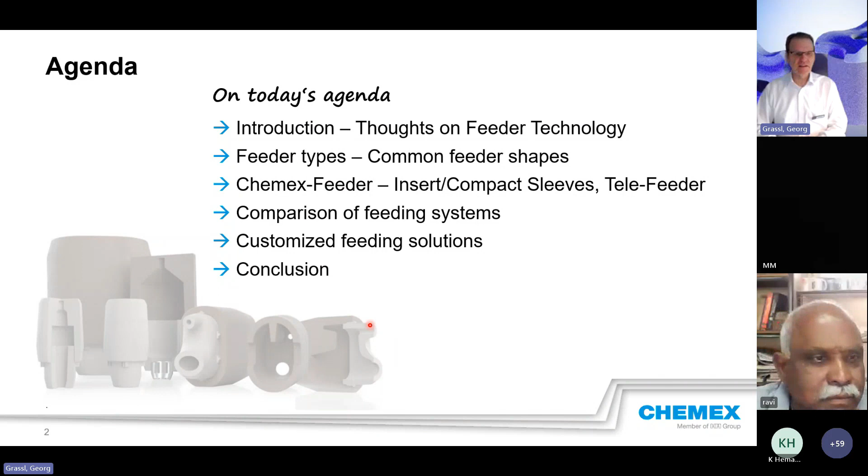So on today's agenda: a short introduction, thoughts on feeder technology and what foundries have to think about today, then feeder types. There are some common feeder shapes, different shapes available all over the world, and especially the Chemex feeders - insert sleeves, compact sleeves, Tele-Feeder. This has been our main product for more than 20 years. We'll also cover a comparison of feeding systems, customized feeding solutions, and finally a short conclusion.

So first, why do we need to feed the casting? I think all of us know why we have to do it, because all metals and materials increase their volume by heating up, by melting. This means, in the opposite, by cooling down, they decrease in volume.

This is very nice if we have a raw, pure material, but if we have different phases, like we have in iron, also in steel or other metals, then it's a little bit more tricky.

So with these two phases - phase one, the liquid shrinkage, and phase two, solidification shrinkage - we can support the process with the feeder. In the third phase, the solid shrinkage, underneath the solidus temperature when everything is completely solid, then we have to work with the pattern shop, with the pattern offset.

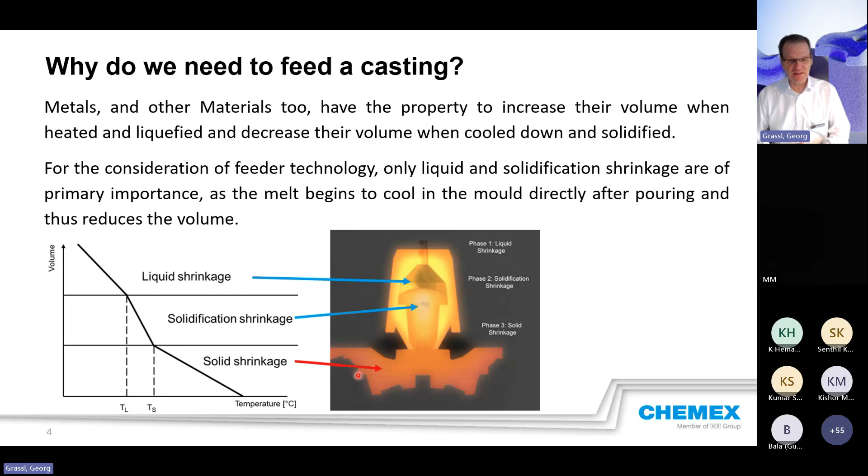For the natural feeders, you have the atmospheric feeder and natural blind feeders. Here you see just two samples.

So when we go to the bonded feeder, we can divide in the ram-up not possible. This means you usually use open feeders, or you use the blind feeders and add it later on. So both you can use with or without a breaker core.

When we go to the possibility of the ram-up possibility, then we have two sections. We have a compact feeder, which is like this. Also you can use this, the Tele-Feeder.

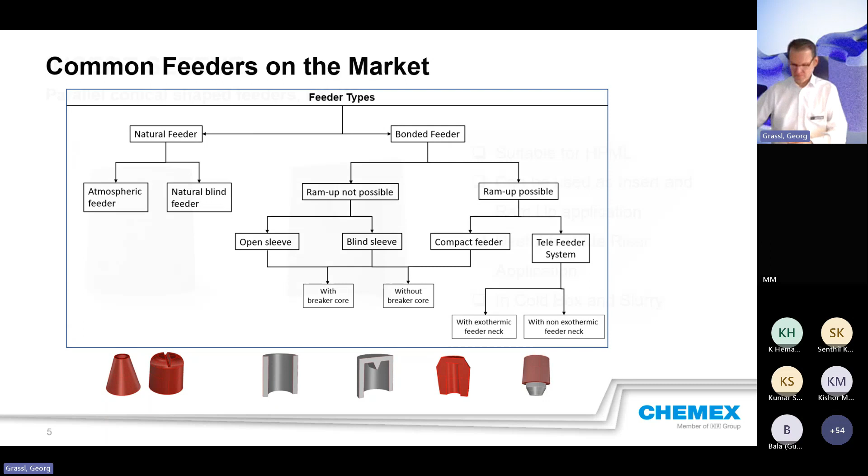So first, the insert sleeve, we call it insert sleeve. In Germany we call it EK. This is a parallel conical shaped feeder. It's an old type. This was started using when they had the first generation of molding lines, automatic molding lines.

At this type of molding line, it was not possible to ram up, place it direct on the pattern before filling up by sand. So the feeders were added later on in the mold. This type of feeder is suitable for the high pressure molding lines and can be used as insert sleeve, but also now as ram-up application.

Also this is useful to place it on the top of a side riser, of a natural side riser, because it gives more power to the feeder and also supports the yield, because you can reduce the volume of the natural feeder. These types are available in cold box bonded material and also slurry one.

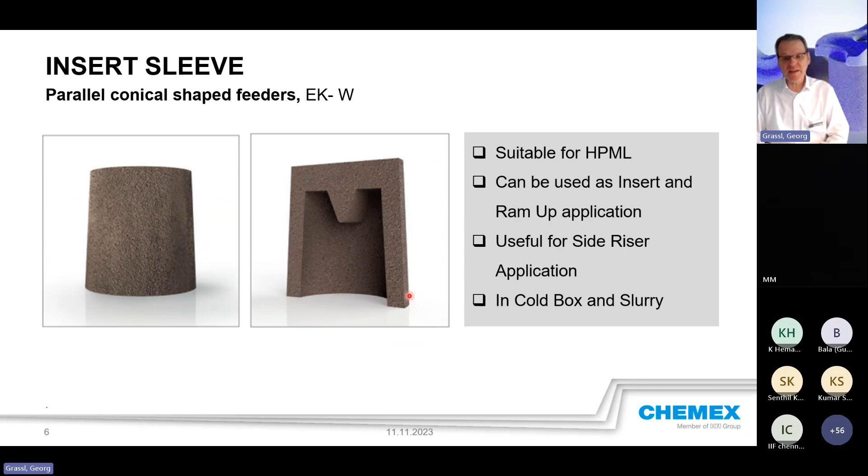There is another part or another shape of the insert sleeves, which is this one. The outer shape is exactly like the same as before, and the specialty is the inside. We have a much longer Williams bar, and the idea behind it is to give more power and to reduce the volume.

These feeders are also suitable for the high pressure molding line, and the same like the one before, can be used as insert sleeve, but also for ram-up application. Also it's useful for the side riser application, and as I said, made for yield improvement.

Let me tell you a story about what we had in Germany. We had a foundry here which were using our standard product with the standard William bar. And they used what we call EK6090W, which had a modulus of 1.7 centimeter and a volume of 178 cubic centimeter. The customer came to us and asked if we can reduce the volume of a feeder, because the customer had an automatic molding line, and the intention was to pour more molds out of the same ladle.

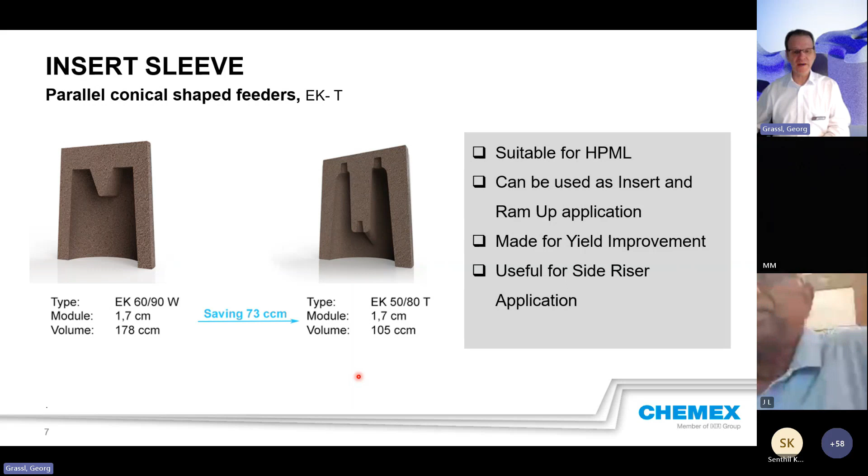As I said, it's very helpful, or can be very helpful, to place such a sleeve, a standard one or a turbo one, on top of a natural feeder. In this simulation picture, you can see we have a casting, and we made this simulation to show the advantage.

When you see this one, this is without a sleeve on top. In the same cooling time, it's very small and even a cold hotspot now. Here we have it covered with an exothermic sleeve, and you see here it's much bigger and much hotter, much higher temperature of the liquid metal. So this material can still feed, but this one, yeah, it's very tricky now.

So this is an advantage even for the customer because he can reduce the size of the feeder.

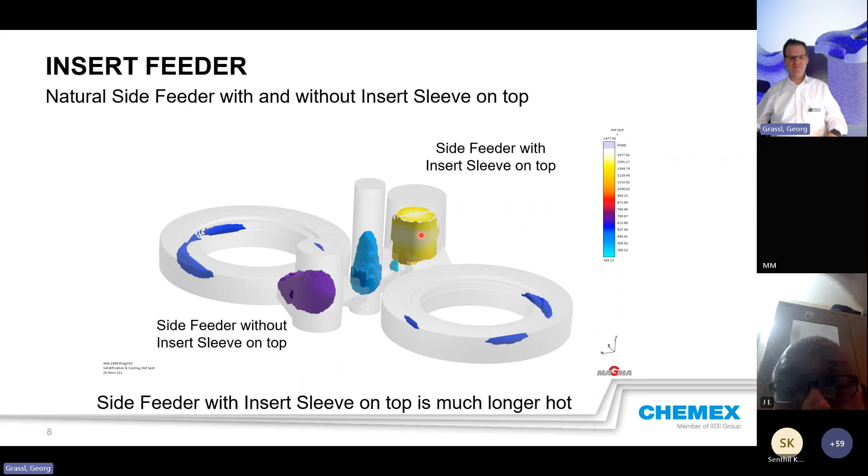With the second generation of automatic molding lines, they were able to place a feeder on the pattern. So the ram-up possibility was given, and we developed the compact feeders - we call it the CD type. These types are suitable for high pressure molding lines, also for ram-up, and they can also be used for core package applications.

So this is also useful for side riser application, and also, as I said, for core packages. So it can be used on top as well.

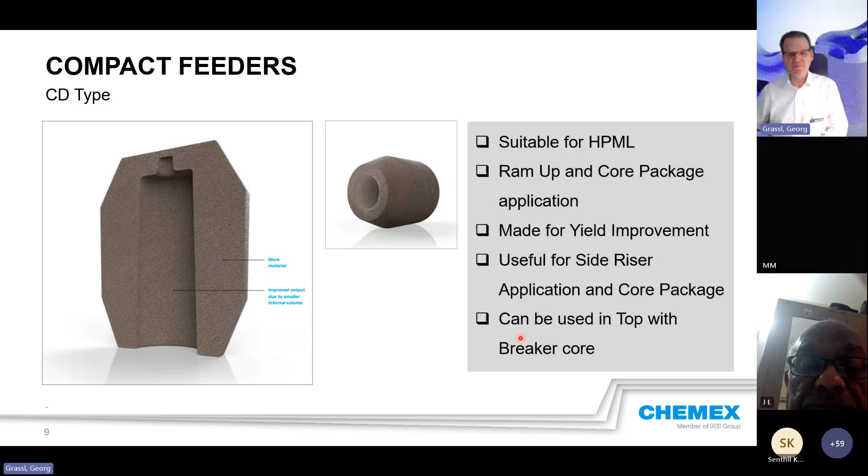Also with the second generation of molding lines, they increased the compaction pressure, the squeezing pressure. And what we found quite often in foundries were broken breaker cores, or even worse - in the worst case, the complete feeder was broken. So we also discussed with customers, and they said the biggest problems were low yield, high fettling costs, increased scrap rate, and limited space on the pattern for risers.

We were thinking about what we could do, and one of my former colleagues had a good idea. He found a solution, and now Chemex can provide high feeding efficiency with our products, high strength - they will survive all the squeezing - feeders with a low footprint and a compact design.

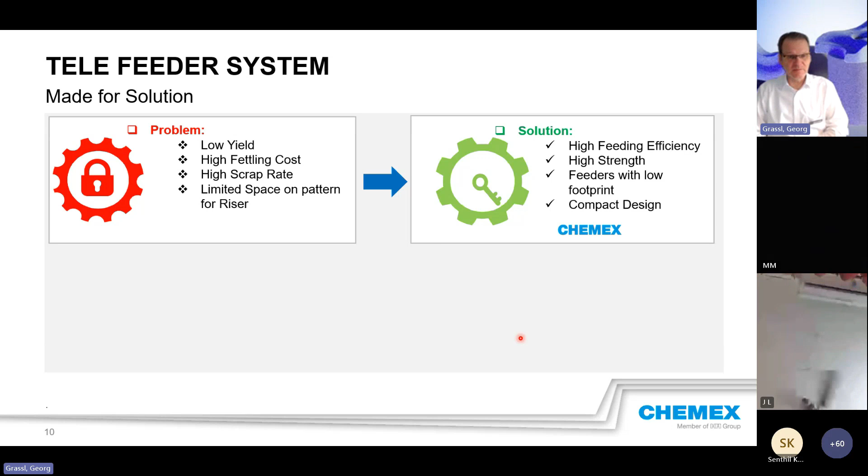The advantages for the foundries are they can use the highest possible compaction pressure of the molding equipment without damaging the feeder. This gives more freedom in placing a feeder, and this is nowadays even more important because we know casting designs are more complex. So now we can mold even more complex casting designs with high feeding efficiency, and this leads to better casting yield - a very important advantage.

The material we are using is without fluorine, so this means no fluorine-related defects, like fisheye for example. When you see slurry products, they have a fluoride content on average of 2%, 3%. So we have no fluorine in our material.

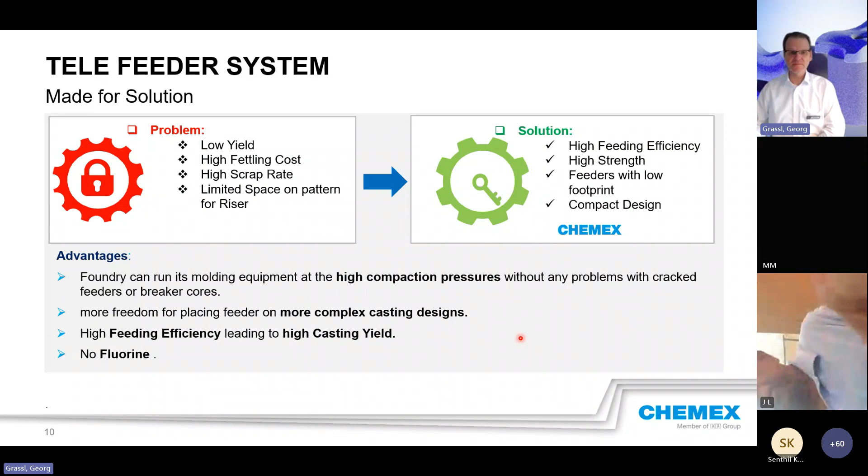So this is how our solution looks like. We call it the Tele Feeder because we have a telescopic movement. Number one, we have a high output, volume output up to 50%, meaning a discharging factor of 50%. We have a telescopic movement - during squeezing, the upper part will move down and cover the lower part.

At the same time, there is no pressure on the lower part, and you have much better sand compaction underneath the feeder, the upper part.

Our lower part of the feeder is always exothermic material, because this is the section that needs to stay quite long liquid. We've also added a very nice, well-defined breakoff edge, as you can maybe see here in this section, because we like to knock it off easily, and this supports that.

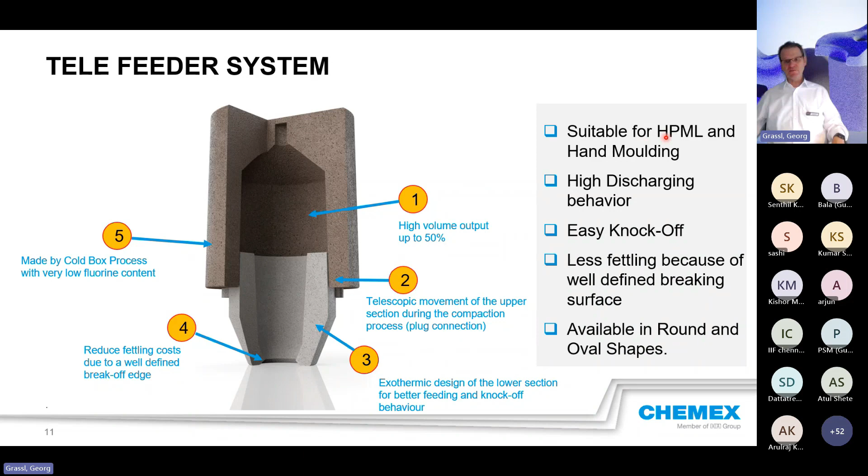So this means it's also suitable for the high pressure molding line and also for hand molding. In hand molding, sometimes jobbing foundries or steel foundries which have bigger parts do not need an exothermic upper part. So they use an upper part as isolating or with isolating material, and the lower part is always, as I said, an exothermic material. So a high discharging factor, as I mentioned.

Easy knockoff based on this very nice breakoff edge, less fettling cost, also based on number 4. And these feeders are available in oval shape and in round shape. We have the possibility to combine a round upper part with an oval outlet, or we have both in oval, an oval upper part and an oval outlet. So we choose this according to the application of the customer.

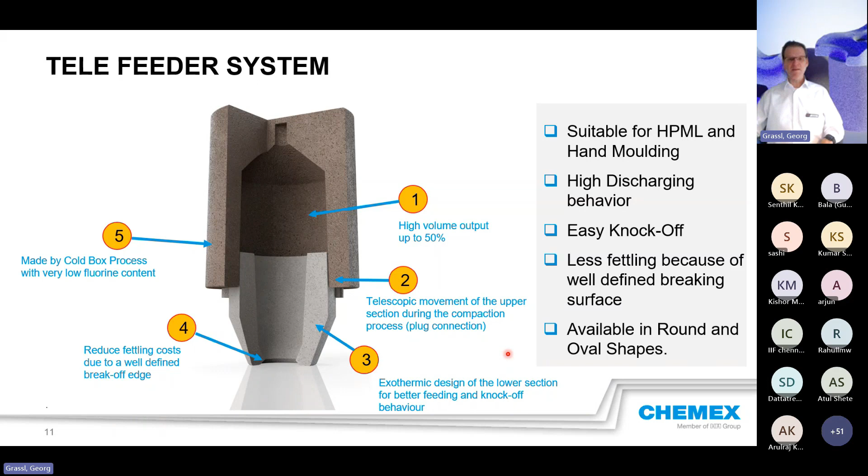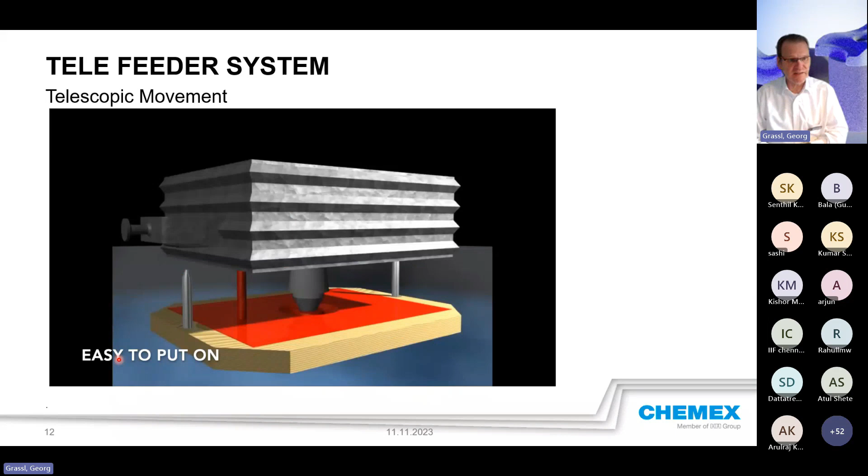Where do we have to place the feeder? What possibilities do we have, or the customer have? This is an animation of how it works on an automatic molding line. So it's easy to place based on the inner shape.

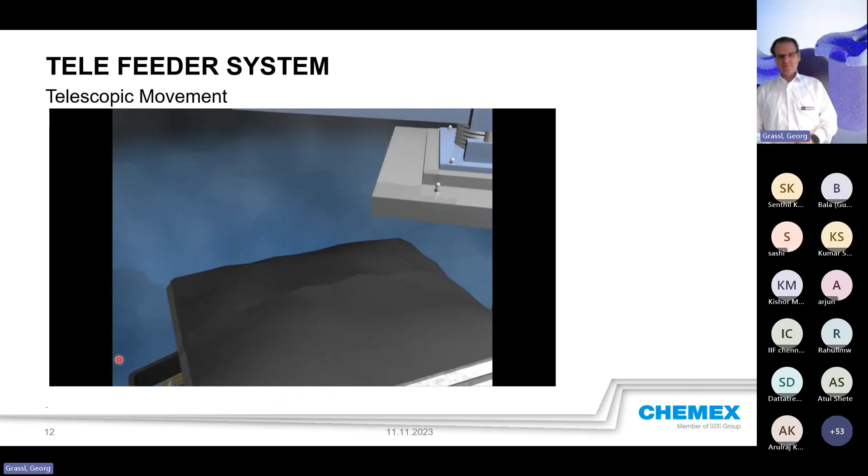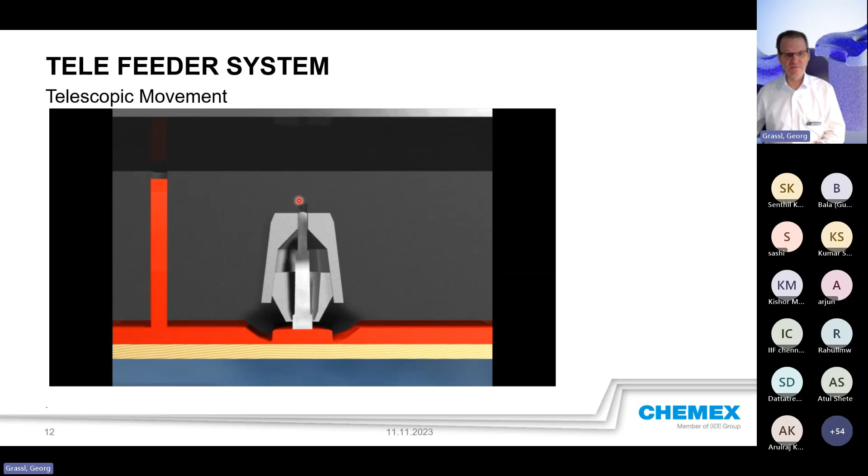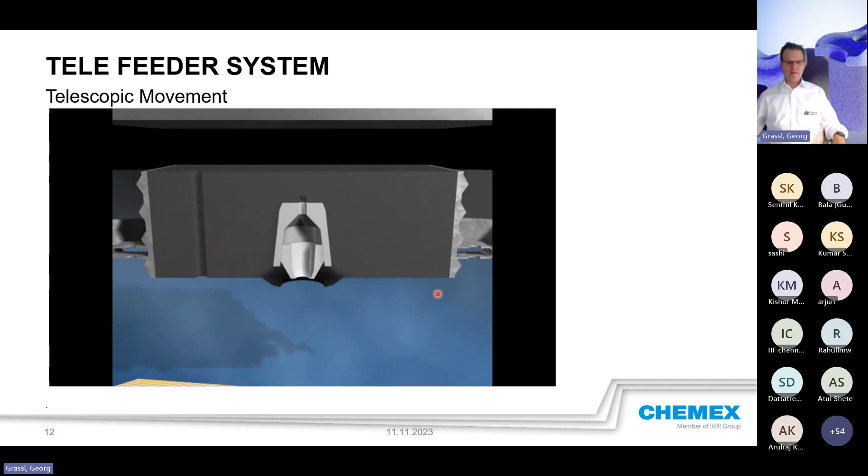It will fill up the mold. Please keep an eye here on this section and the same on this. The pin goes through, this is for better venting, and at the same time you have much better compaction underneath. This means there is nothing falling down inside the mold during closing of the mold.

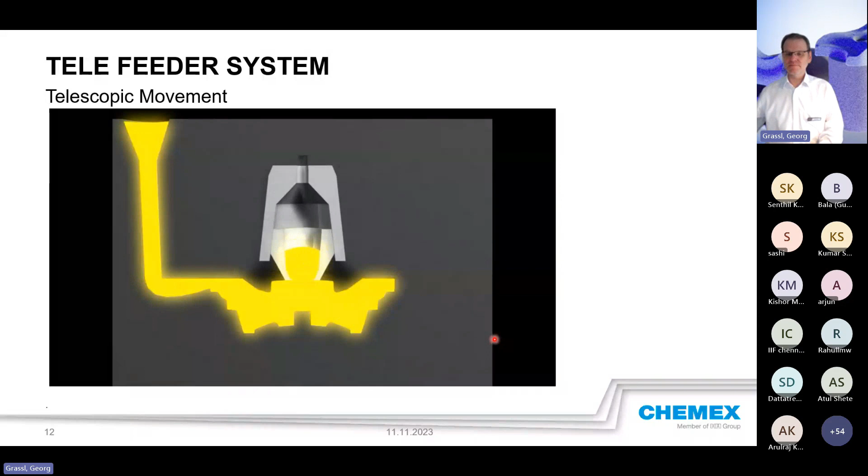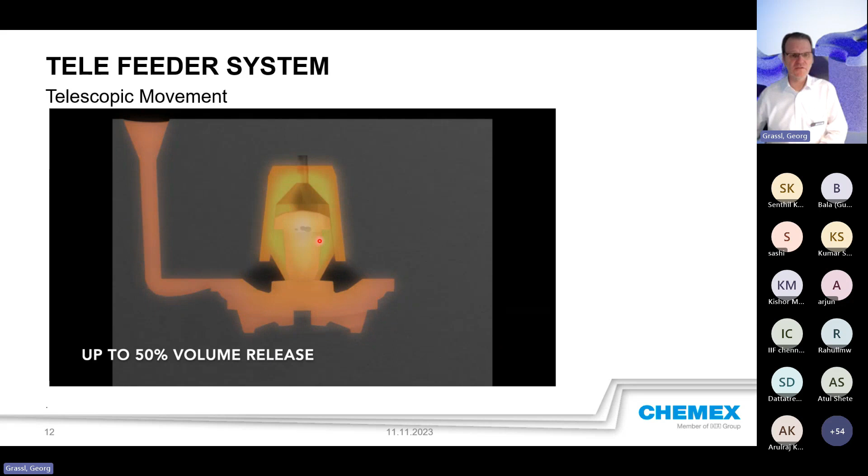So now starts phase 1, phase 2, solidification, discharging up to 50%. For some materials, some applications, even more than 50%. So easy knockoff, and you have a very well-defined breaking edge, breaking surface. So this all leads to reduction in riser weight. Here you can see we had a riser, it was a casting, a main plate, material FCD 500.

The casting weight was 105 kg. The riser weight was before 12.7 kg, and by using a Tele Feeder, the riser weight was only 3.1 kg. So there was a lot of metal saving, 9.6 kg per mold, and it was easy to knock off. You can see here the breaking surface, so not so much to clean. And this is a big advantage and also a cost saving for the foundry.

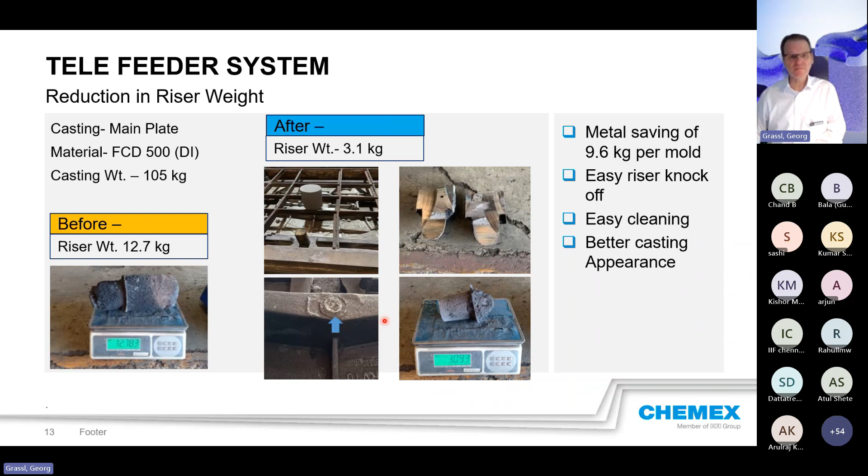There's another example, shredder hammer. The material is alloyed steel. The casting weight is 145 kg, and they were using slurry feeders, big slurry feeders. You can see it in the backside. So it was much higher.

And it was a lot of work because what this foundry made, they were using also chromite core, breaker cores, what they made by themselves, and they added the day before. They assembled the breaker core with the slurry feeder. They had to dry everything and then they placed it in the molds. So here they had a ready-to-use feeder, a Tele Feeder. The weight before they used the Tele Feeder was 68.2 kg, and this one was 23.5. So it was also a metal saving of 44.7 kg per casting.

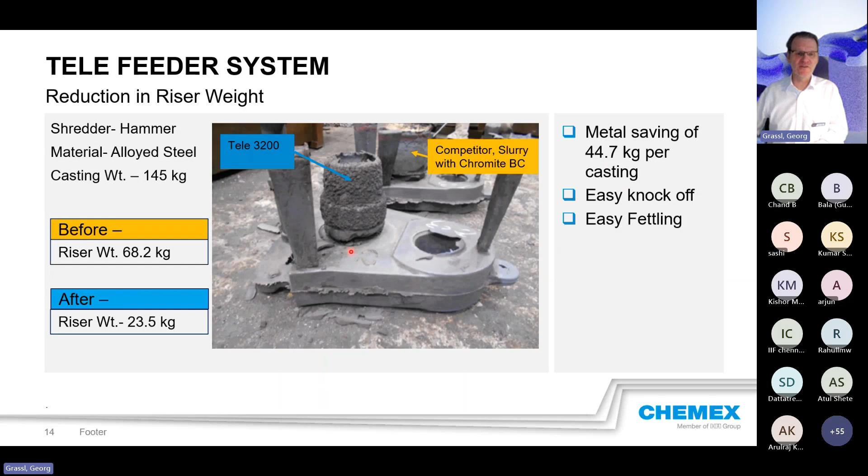An easy knockoff, they were using a pneumatic hammer to remove it. But we made also a trial, and even this one you could remove by hand. So the fettling was also much easier. Another advantage for cost reduction because of the fettling.

On the left side here, you can see there is a feeder. It's a competitor feeder with a metal lower part, and these molds, it was a very tight area here, and the molds here always cracked. You can see the cracks here. So the customer asked for help.

We offered him a Tele Feeder. You can see here on this side, and there is no crack. Everything is nice. The customer was very happy with this and is using now this type of feeder. So this means less fettling. Here this comes from the spring back effect.

And in the worst case, it can also crack a little more and some parts are falling inside the mold by closing the mold. And you have sand inclusions and you may have to scrap your part, your casting. So this is safe on this side. Also good compaction underneath, no mold breakage, defined breaking edge, and no additional pad underneath, what they had here.

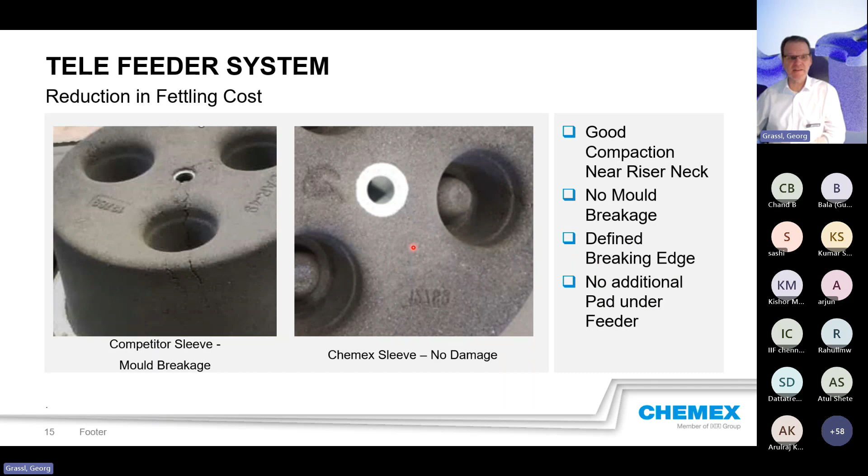Let's compare different feeder systems. When we see the different feeder systems, we go the way here like this. We compare and we make the cube test. They are all the same sizes, the cubes. They have a weight of 7.4 kg and a modulus of 1.7 centimeter.

So this means by calculating the modulus for the feeder, we multiply the 1.7 by 1.2. This means we get a modulus which is required for the feeder of 2.1 centimeter. For a natural riser, you need a very big quantity of liquid metal to feed this casting soundness.

So the weight of this feeder will be 6.23 kg, and let's say this is our benchmark, so we say 100%. By using the blind sleeve, exothermic blind sleeve, an insert sleeve, you only need a weight of 1.26 kg.

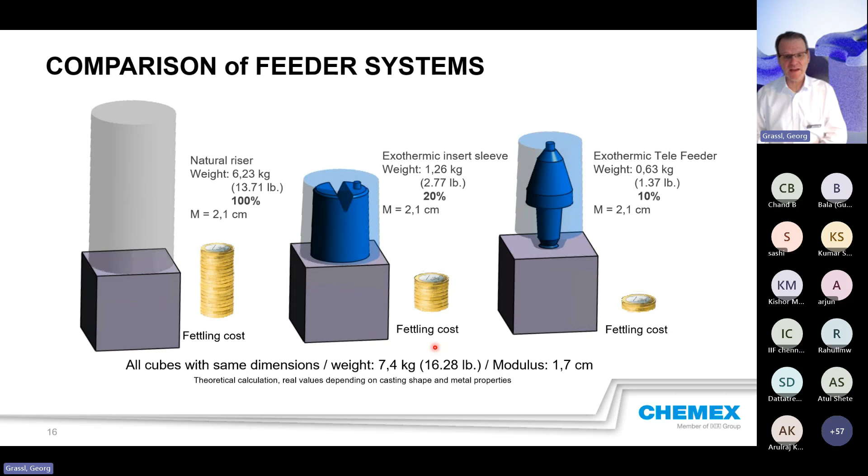So it is really possible to reach these numbers, it's not only theoretical calculation. And we repeated these trials this year, and it was exactly the same result. This means a lot of saving for the foundry, because we all know raw materials are increasing, and the problem what we have now - we also have higher costs.

So why can we do this? Here you can see I try to show it with 4 different types. On the left side, we have the sand riser. The sand riser has a discharging factor of 15%. And we have an exothermic open sleeve, which has usually, let me say, round about 30, sometimes a little bit less discharging factor. It depends always on the material.

So an exothermic blind feeder has a discharging factor of 35 roundabout, and the Tele Feeder has a discharging factor of 50% and sometimes higher. As I said, always related to the casting and metal grade.

At the same time, you can see here, this is shown for the solidification time. So here you are quite long, hot, and you cannot really say where is it - is it in the feeder? Is it in the casting? So there's a big possibility that you get porosity or shrink holes in the casting.

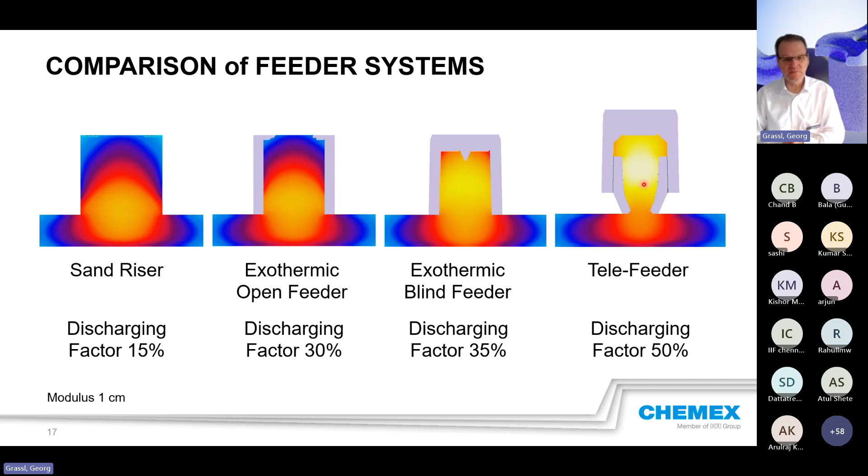This is what we like to have in the foundry. We like to have the feeder solidify at the end, not somewhere in between, where the metal doesn't know exactly where it will solidify and we create shrink holes. The feeder is the place where we like to have the shrink holes, because we knock it off and remelt it. So the casting is good.

Company Chemex also developed side feeders. They are made for vertical molding lines or parting lines, like Disamatic. But the reason why I like to show it here is because the side feeders can also be used on horizontal parting lines - jobbing foundries, but also at automatic molding lines for big volumes.

So this is what we call a Tele side feeder, because it's also two parts. It's working like a Tele Feeder, but in a different orientation - vertical orientation. This is a side insert sleeve, because you place this after molding, or you make it in an extra way.

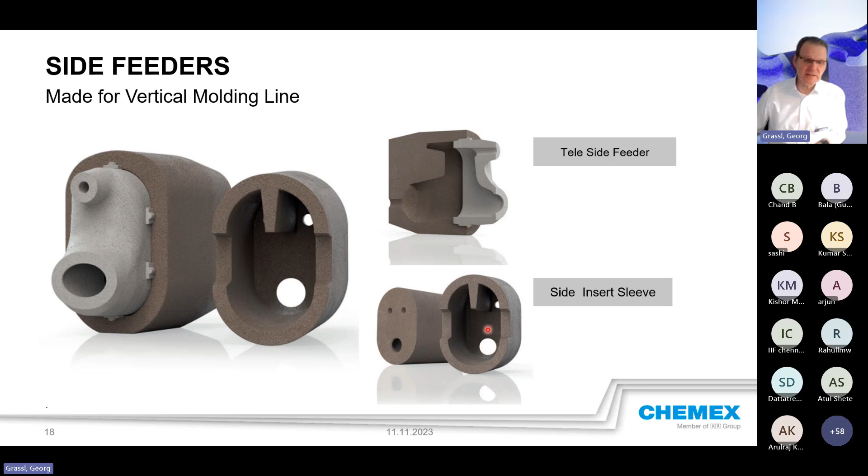You can use the standard one, the round ones, for horizontal parting line, but here it does not fit because it's blocked here - it can interfere with this area. What we made is that the customer should place a small socket here, and we placed the feeder on these two spots. Here it is feeding - this is only so that it's not bending during squeezing.

So we have a much bigger volume even beside the casting, sorry. And this helps - now we can feed this section underneath the feeder with enough material.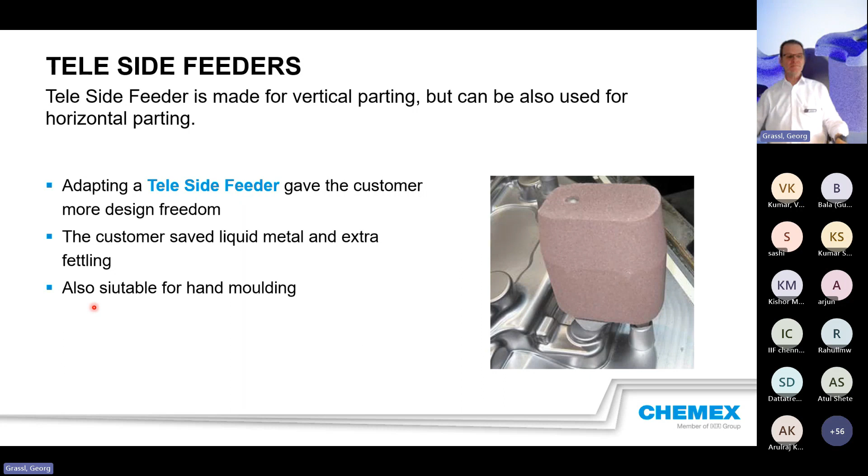This is a very big advantage for foundries. As I said, usually this is developed for vertical parting lines. I have another customer who is also using exactly this part in hand molding. He was able to reduce the volume of the side feeder, and also improved the knockoff - it's much easier. He has a smaller breaking surface now, which means less fettling cost, and at the end, a lower cost. So this is a big advantage for foundries.

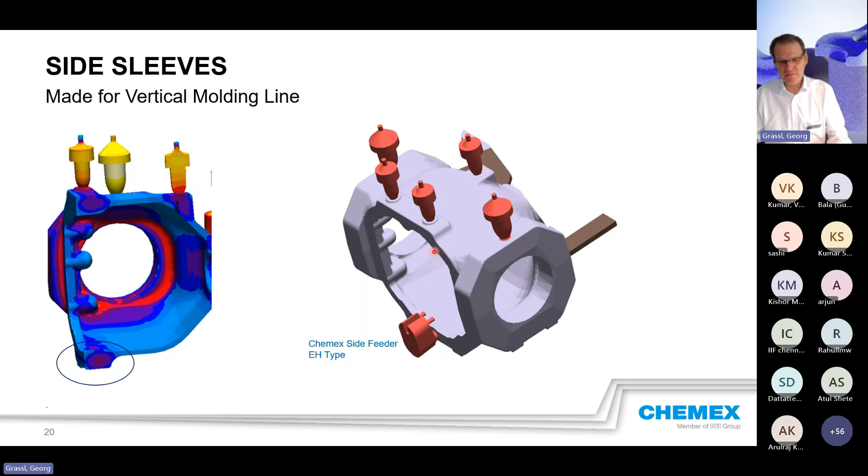So now we are able to feed exactly where we need to feed. We do not need any extra material to create a feeder pass, or we may need chills, and have to take care of different types of chills. We can also reduce these costs, and this is a big advantage for foundries.

For difficult-to-access residual solidification areas, a pad will be good and can help. And the pad doesn't have to have a shape like this - we can make flat pads, the same as your casting surface. We can have very small ones, maybe two. I have one which is only 3 cubic centimeters big, in a small corner. It's an isolating one, so if additional geometry modification would be necessary, but it's not allowed...

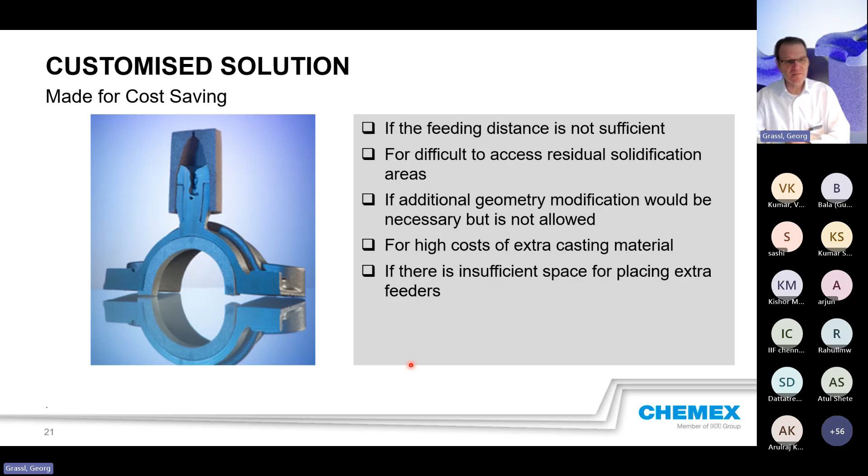You have a higher yield because you need less liquid metal. You are able now to feed the casting where you need to feed - not like a side riser where you have to be beside the casting and hopefully get fed at the spot where you need it. With the Tele feeder, or also with other feeders if possible on the casting, you can feed where it's necessary. You have less fettling based on the small spot. Reduced segregation and also hotspot below the feeder, and no fluorine in the material.

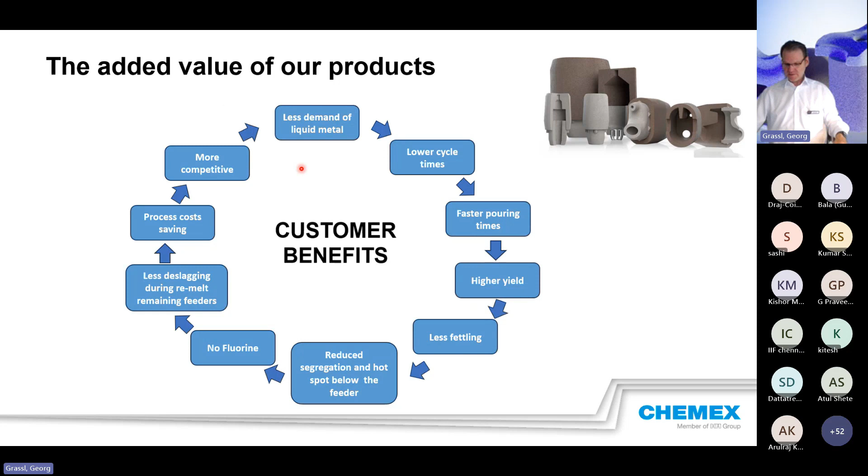So this was my last technical slide. What I'd like to show you now is just one slide.

I'd like to introduce our app. We have a Chemex app. You will find this on the App Store for Apple and Google Play for Android. The app is free, you can download it. There are different types, different areas in the app. You can see animations, you can calculate the modulus, you can choose the right feeder, or it suggests the right feeder for the modulus. You have a kind of catalog there, and other areas very useful for the daily business.

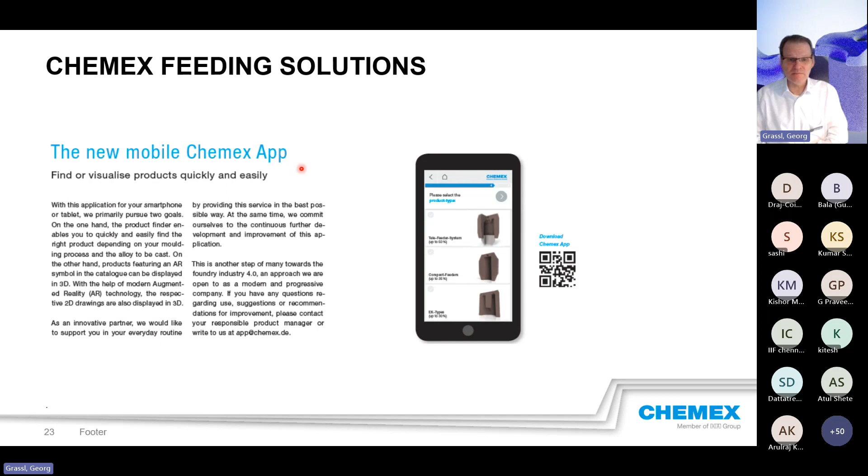As I said, it's free to download, and I can only offer it to you. Many people say they are happy to have it, especially in daily business, if they are somewhere in the plant and have a meeting and have to check something. So this was my last slide. I'd like to say thank you for your attention, and I'm open now for questions.